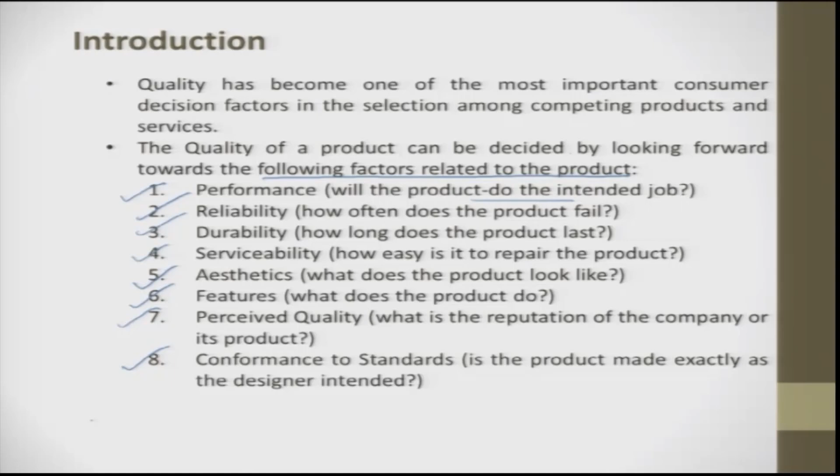I am holding a pen which is a Parker pen. Parker has its own reputation. Because of the Parker company's reputation, when I hold this product, my reputation also goes high - that is perceived quality. What comes last is conformance to standards: is the product made exactly for what the designer intended? So conformance to standard - these are some of the factors related to the product where the quality of the product is talked about.

So, statistical methods for quality control and improvement. There are three major areas where people have been working drastically, and they have included a lot of math behind it, meaning it is a scientific approach: statistical process control. People have come out with design of experiments, and people have also come up with acceptance sampling.

For example, I buy 10,000 pieces in a lot, and before I accept, if I start checking all 10,000 pieces and then say yes the lot is good, it is going to be time consuming. But one logic is, if all the 10,000 are manufactured from the same company by a machine or group of machines, then naturally the products produced are going to be good. So inspecting 10,000 pieces every time is next to impossible. So what I do is randomly pick some 5 or 10, check the status of all of them, and if it is all good, then I accept the lot. That is what is acceptance sampling.

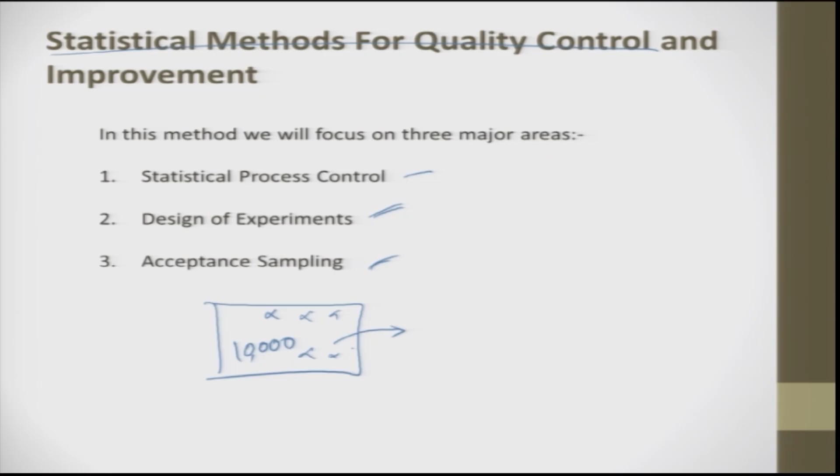And here also there are a lot of logics. If it is a vital product, 100% has to be checked. If it is a non-vital product or part, then they say out of this 5, if 2 fail also, it is okay, you can accept the lot.

There are certain things like that.

Statistical process control is a powerful collection of problem solving tools, useful in achieving process stability and improving capability through the reduction of variability. There are 7 tools generally used as part of SPC: histogram, check sheet, Pareto chart, cause and effect diagram, defect concentration diagram, scatter diagram, and control charts. These are always thought of as part of SPC, which is to be followed inside your factory so that you produce quality output.

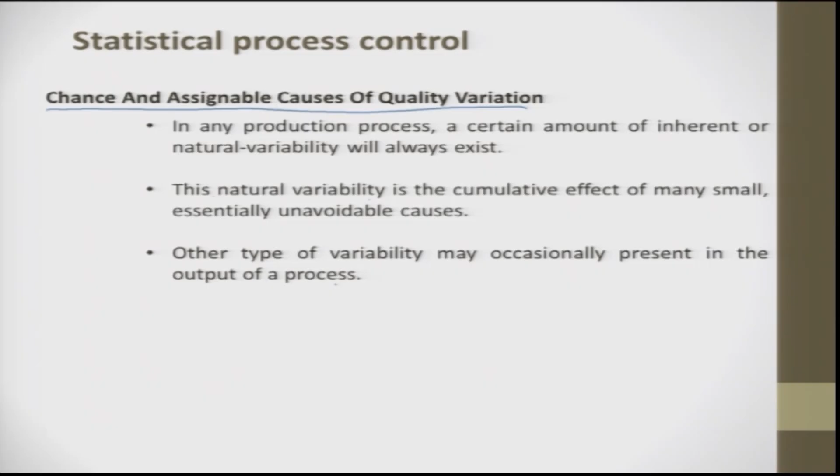The other thing is chance and assignable cause of quality variation. In any production process, a certain amount of inherent or natural variability will always exist. This natural variability is the cumulative effect of many small, essentially unavoidable causes. The other type of variability may occasionally be present in the output of a process, and this is called assignable.

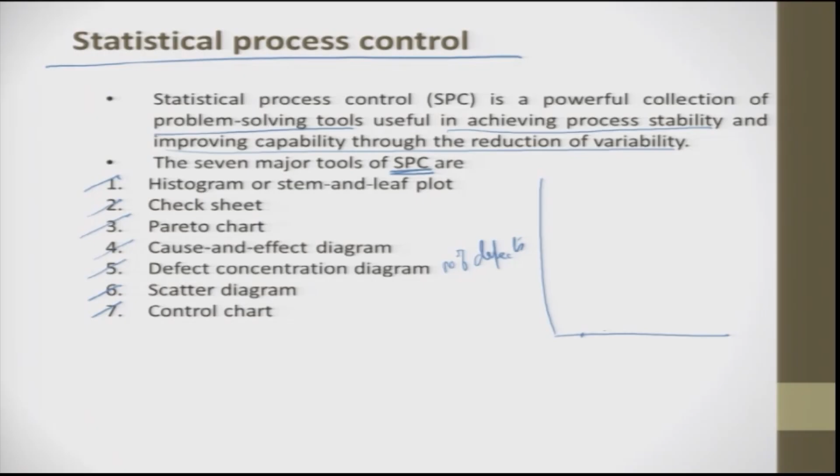There are control charts, but let's go back to histogram analysis. Suppose we plot the defects on one axis, and the number of defects, and the other axis can be parts - part A, part B, part C, part D. You have a block diagram showing how many of part A failed in that period. For example, in the 52nd week, how many parts of A failed, B failed, C failed, D failed - that is called histogram analysis.

The check sheet - you can see this in airports and other places where a checklist is given. People ask you to check whether this document is submitted, that document is submitted, then this, then this, then finally you upload. That is a check sheet. We give a standard procedure and you follow it.

Pareto analysis is almost the same, but here we try to see what is the effect of these defects on the output. That is what we see in Pareto analysis.

Cause and effect diagram is something like a fishbone diagram. We try to show these are the causes and this is the effect of it.

Then the defect concentration diagram - it tries to tell how many defects have happened in that period of time. That is called the defect concentration diagram.

Scatter diagram is where you plot all the defects and try to make a cluster. Then you circle out the cluster and try to figure out what caused this cluster to form. That is what a scatter diagram is, and we can talk more about it later.

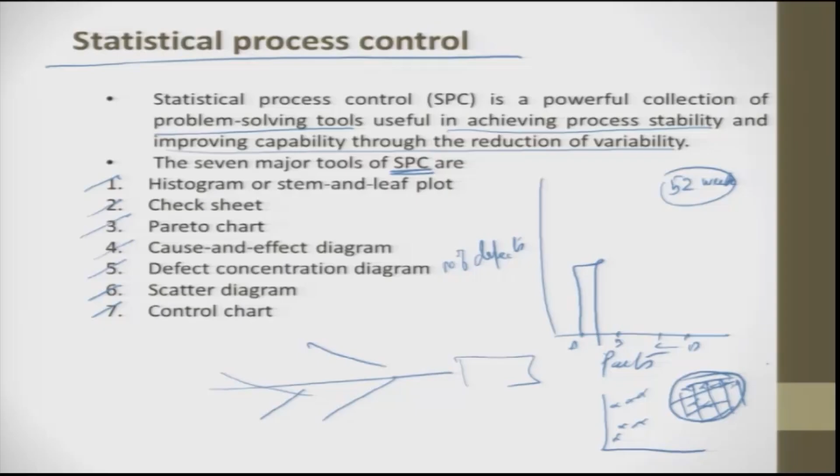Control chart is P chart, X chart - we will see all those details later. A control chart is one of the primary techniques of statistical process control. This type of chart plots the average of measurements of quality characteristics in samples taken from the process versus time.

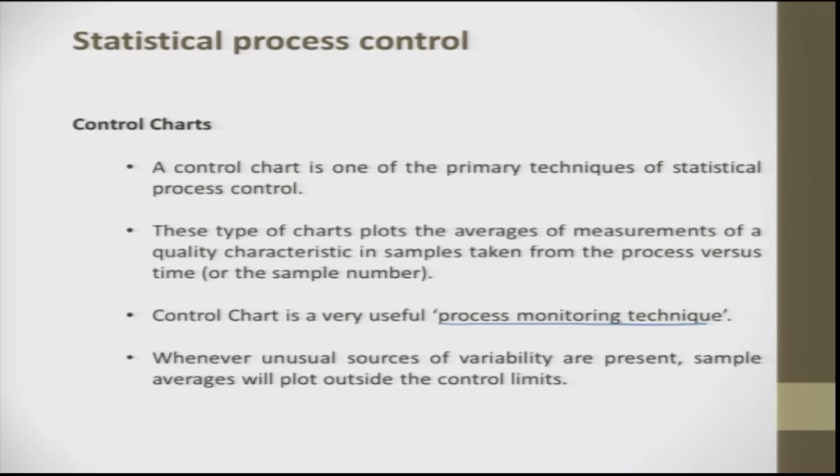We take a product, a part which is produced - this can be once in 50 parts or once in half an hour. We pull it out and check the various dimensions and deviations and note it down. The control chart is a very useful process monitoring technique, because at every 50 or every 100 parts you pull out, measure the features, and report those features.

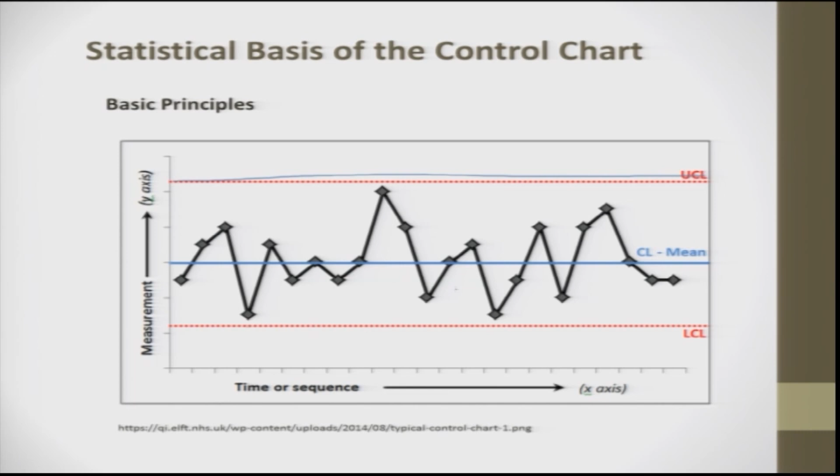If you look at the diagram, it's clear there is variation happening at regular intervals of time. Whenever it tries to go very close to the upper or lower control limit, we try to reset - for example, we resharpen, relook into the fixture, or change the tool. Once that is done, you can see it pulls back and goes into the normal range. So this gives me a lead that the time has come to reset your process.

So the basic principle, as I've already explained, talks about the chart containing a central line that represents the average value of the quality characteristics corresponding to the in-control state.

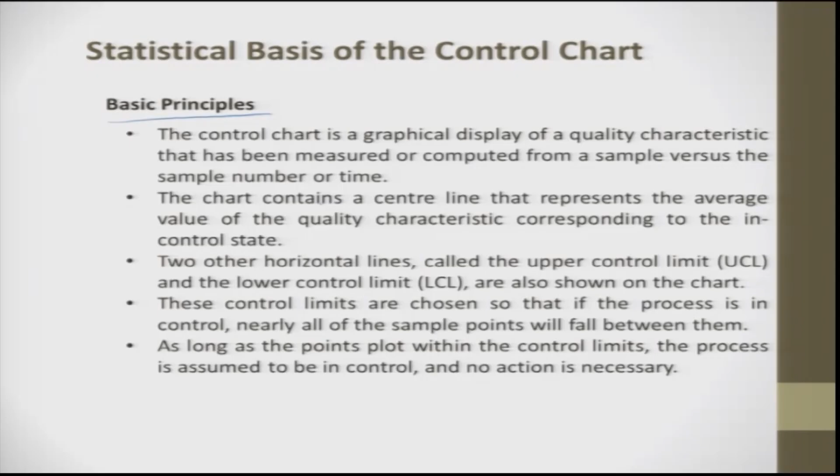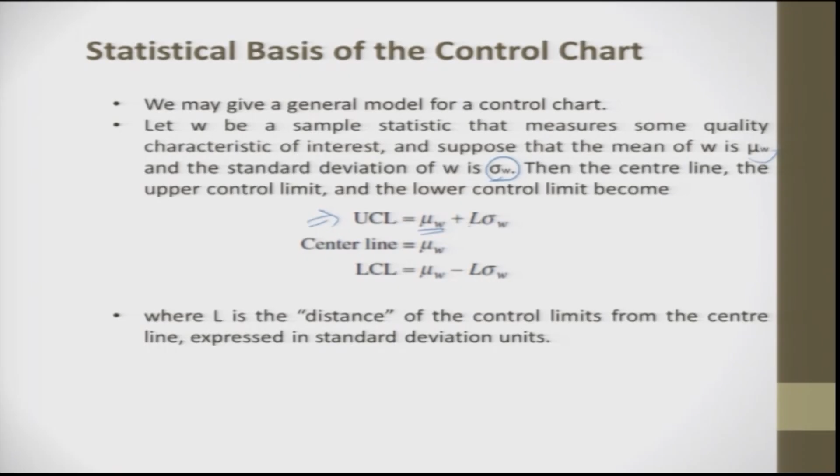L stands for the distance of the control limits from the center line. This is the statistical basis for the control chart. The control chart is a device that describes in a precise manner exactly what is meant by statistical control.

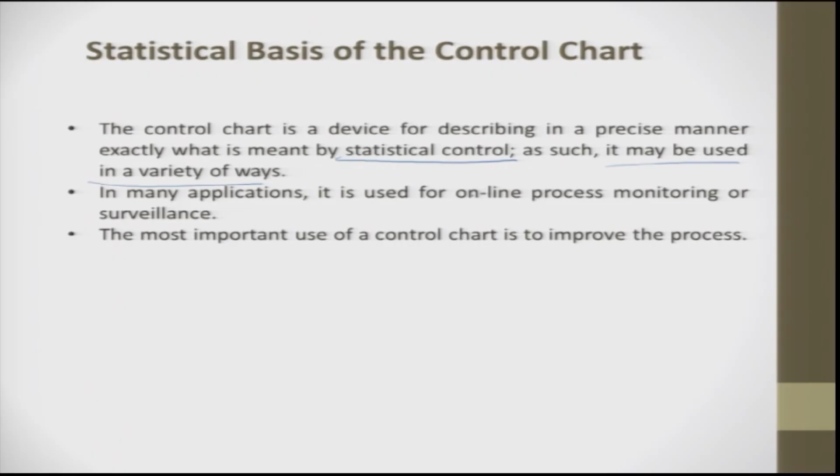As such, it may be used in a variety of ways. In many applications it can be used online, and many times it can also be used offline. So input, here is a process, it can be reading, cooking, machining, or assembly. So input, process, you get an output.

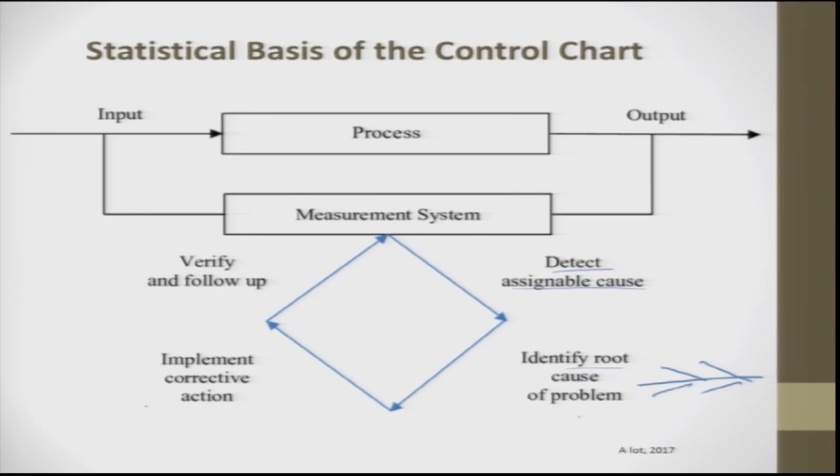So you try to measure, you try to detect an assignable cause, then you identify the root cause for the problem. This is done by the Ishikawa diagram, and then you implement the correction, and now verify once again whether the defects are coming or not. If it is not coming, it is fine. If it is coming, then once again go into the root and try to modify it. So this is called an assignable cause.

So the statistical basis for the control chart is a very important part of the corrective action process associated with the control chart, usually known as the out of control action plan, OCAP.

OCAP is a flow chart or a text based description of the sequence of activities that must take place following the occurrence of an out of control event. So it is like a cause, and it describes what sequence of things must be done so that you can get back to your normal state. That is the out of control action plan. When the process goes out of control, what is the action plan to be taken?

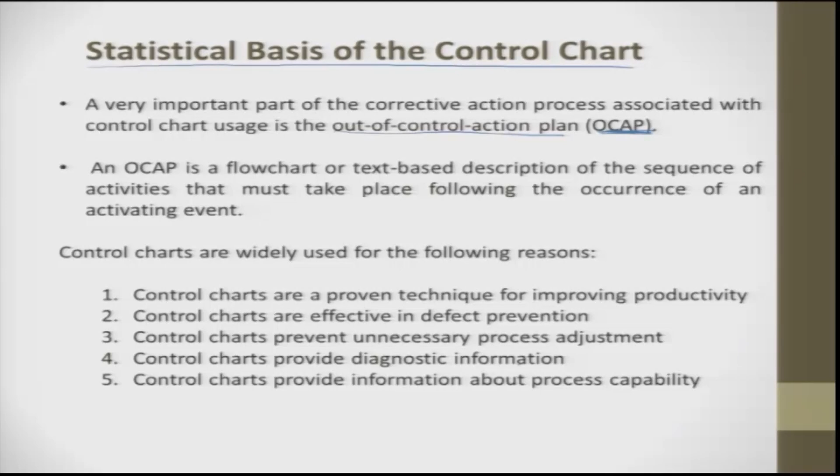The control charts are widely used for the following reasons. They are proven techniques for improving productivity, to reduce defects, to prevent unnecessary process adjustments, to provide diagnostic information, and to provide information about the process capability.

The sample size and sample frequency is another interesting topic to note. In designing a control chart, we must specify both the sample size and the frequency of sampling. So frequency of sampling is 1 in 50, 1 in 100. Sample size is, within that 50, how many samples you have to take.

We can evaluate the decision regarding sample size and sample frequency through the average run length, ARL, of the control chart. If the process observations are uncorrelated, then for any Shewhart control chart, ARL can be calculated as 1 by P, where P is the probability that any point exceeds the control limit. This equation can be used to evaluate the performance of a control chart.

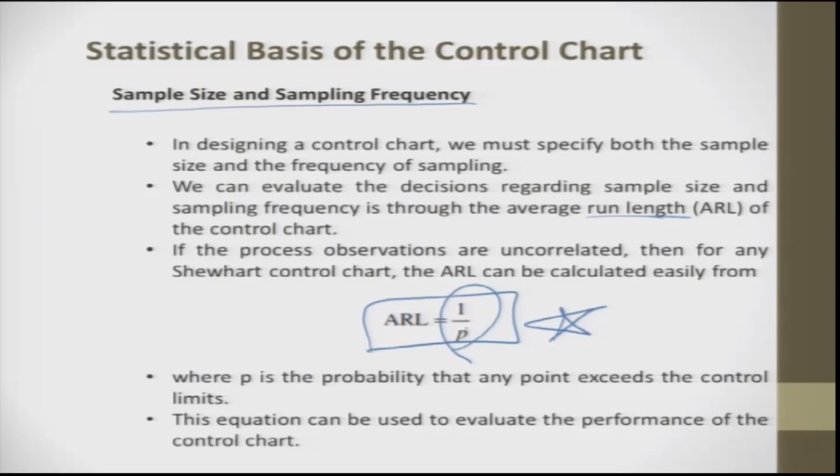This is very, very important. If the process observations are uncorrelated, then for any Shewhart control chart, the ARL can be calculated as ARL equal to 1 by P, where P is the probability of any point which crosses that limit. It is also occasionally convenient to express the performance of a control chart in terms of its average time to signal, ATS. ATS is ARL into H, where H is in hours.

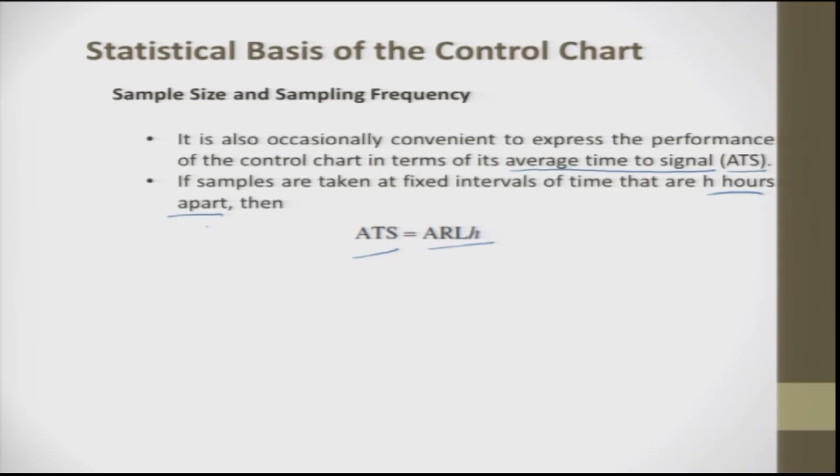So there are several phases, phase 1 and phase 2, of control chart application. The standard control chart usage involves phase 1 as well as phase 2 application with two different and distinct objectives. In phase 1, a set of process data is gathered and analyzed all at once in a retrospective analysis.

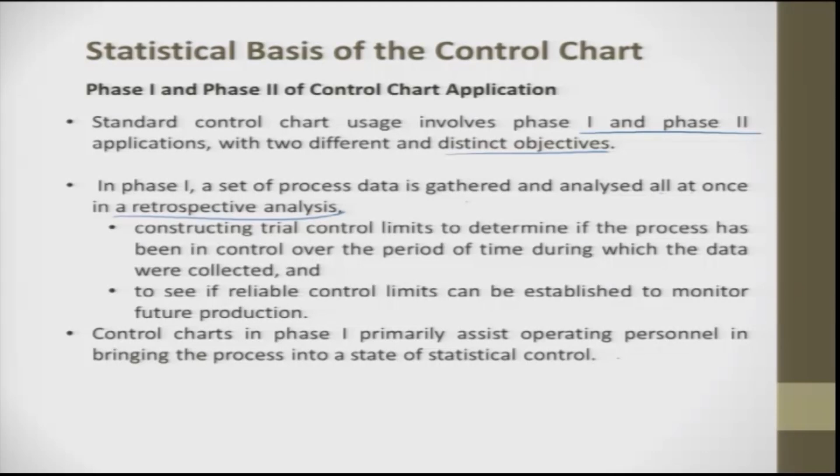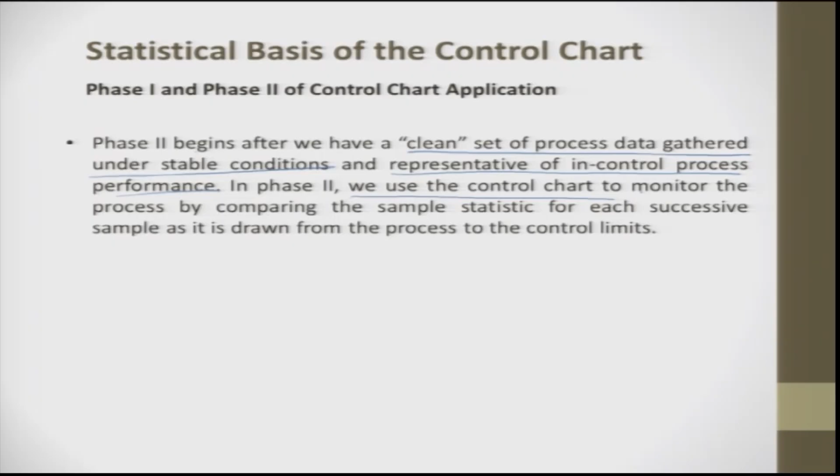The control chart in phase 1 primarily assists operating persons in bringing the process into a state of statistical control, so gathering and analysis of the data is done in phase 1. In phase 2, we begin after we have a clean set of process data gathered under stable conditions and representative of in-control process performance. In phase 2, we use control charts to monitor the process by comparing the sample statistics for each successive sample.

Application of statistical process control and quality improvement tools in transactional and service businesses: the flow chart, operation process chart, and value stream mapping are particularly useful in developing process definition and process understanding. A flow chart is what?

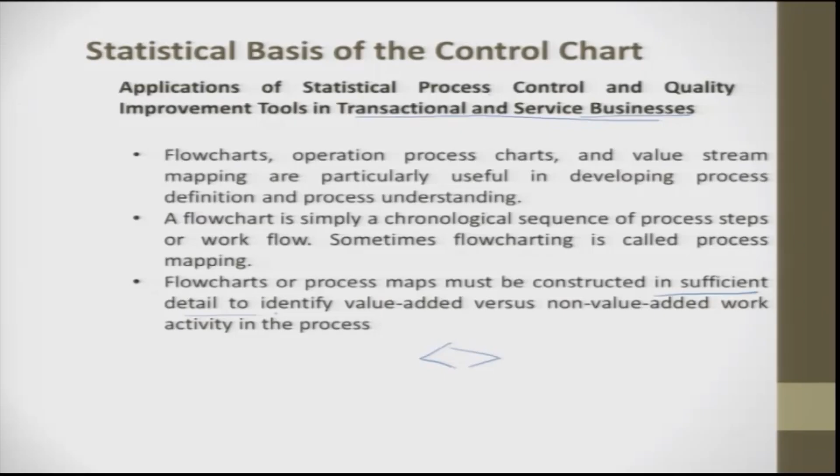A simple, logical way of representing a matter or a protocol in a pictorial, chronological manner is the activity of a flow chart. A flow chart or process map must be constructed in sufficient detail to identify value added versus non-value added work activities.

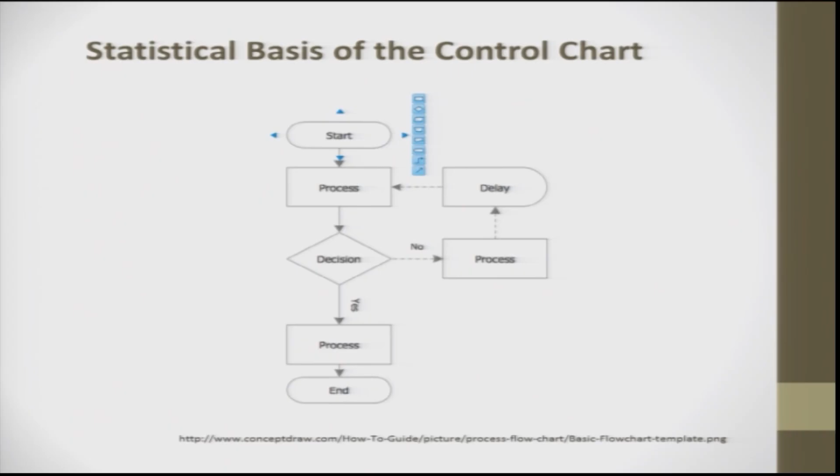This is the statistical base of the control chart, where we follow a flow chart: start, process, D stands for delay, the process is going on, a decision is taken, and then it proceeds.

When we talk about quality control and improvement, statistical process control, control charts for variables and control charts for attributes are available. When the variables are measurable, we use control charts for variables. For control charts for attributes, we always consider a yes/no factor, such as whether the product is working or not.

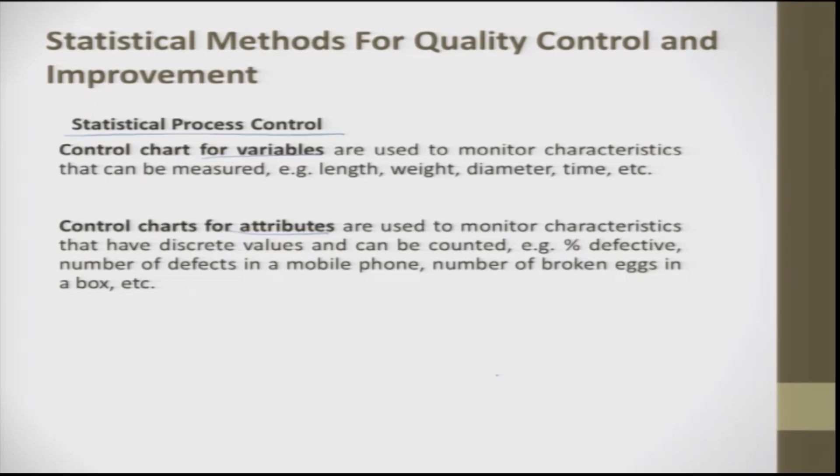Attribute charts are used to monitor characteristics that have discrete values and can be counted. For example, a cell phone working or not working, one defective. Examples include percentage defective or number of defects on a mobile phone, number of broken eggs in a box, etc.

So for n equal to 1, you do this; for n between 2 to 10, you use the R bar chart; and if it is greater than 10, you always go for the S bar chart.

When you consider attributes, it can be single attribute or multiple attributes. For single attribute, if the sample size is constant, it is an NP chart; if not, it is a P chart. For multiple attributes, if the sample size is constant, it is a C chart; if not, it is a U chart.

This is very, very important. So here are some of the formulas which are given.

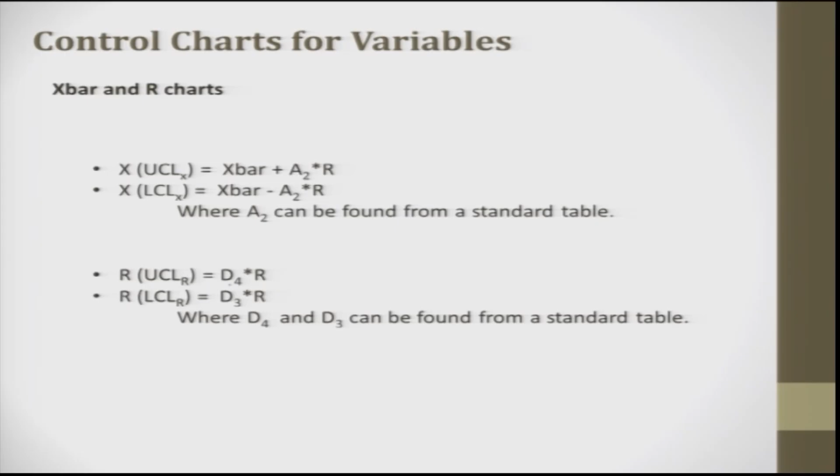We are trying to figure out the upper control and lower control limits for X bar, and upper critical and lower critical for R. You can expect a problem where I give you a set of data and ask you to draw a control chart, find out some value from the control chart, or figure out the lower control limit, upper control limit, etc.

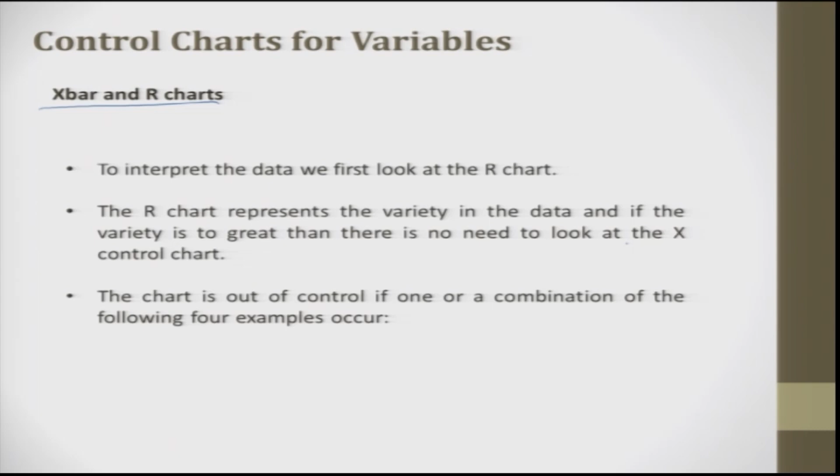I have dealt with the X bar chart and R bar chart, for n between 2 to 10 and greater than 10. The R bar chart represents the variety in the data; if the variety exceeds the limit, there's no need to look at the X control chart—the chart is out of control, and we have to go for this combination.

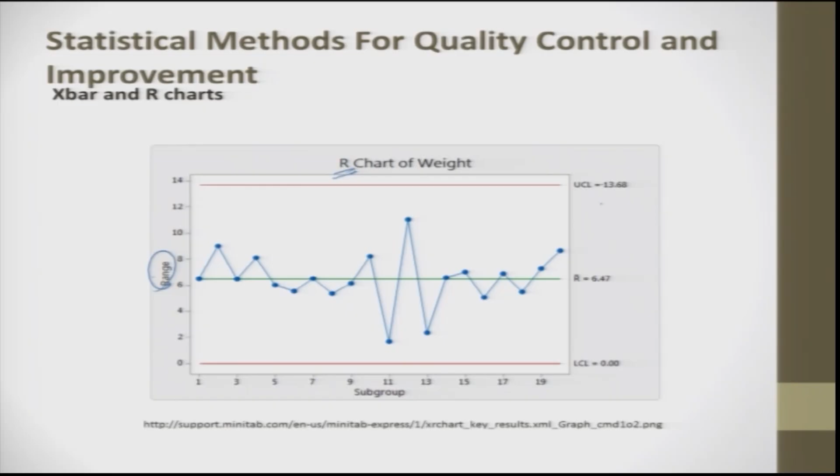P chart and C chart apply to percentage of leaking caulking tubes in a box of 48, percentage of broken eggs in a carton—these are all P charts. Number of flaws or stains in a carpet sample cut from a production run is a C chart. Number of complaints per customer at a hotel is also relevant here.

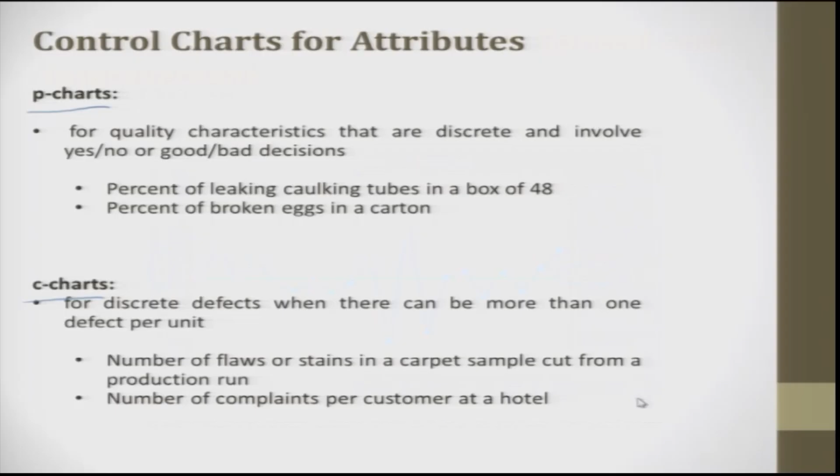Going back, what is the C chart and U chart? So for the attribute charts, how are the formulas done? These are the formulas used to find the C chart.

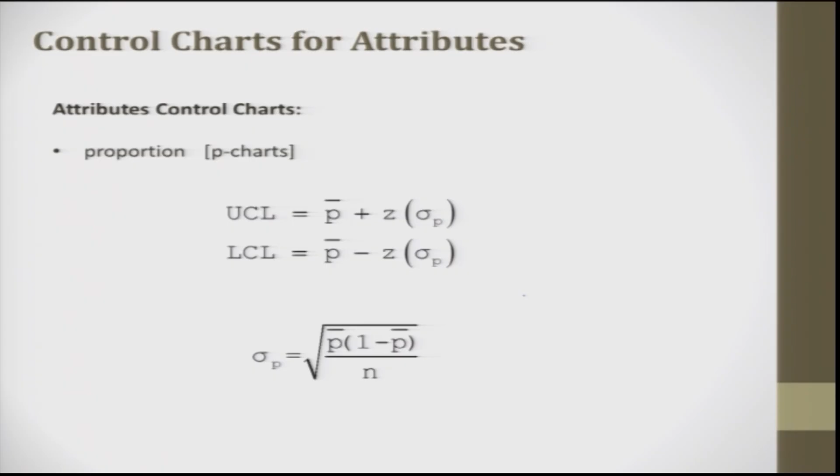Similarly, for the P chart, this is the upper critical limit and lower critical limit—this is how they calculate the sigma. The control limits can be found using this formula. For the P type, again the same pull-back is done.

The control chart for non-conformability, or non-conformities—that is, defects. Non-conformities are defects. A non-conforming item is a unit of product that does not satisfy one or more of the specifications of the product.

That is non-conformance. People always say please submit a non-conformance report. Non-conformance report means I have given you a specification, you have produced something, and when I measured it, these are the parameters which did not stick on or which were not seen in your part. Each specific point at which the specification is not satisfied results in a defect or non-conformity point. You have a shaft, and here are some points where the conformation is not happening.

This can also be represented in a figure. If you go back to the 7 tools, the defect concentration diagram is that. Here what we do is draw the diagram and try to put in how many failures have happened in that particular feature, or will happen at that particular feature, and then put the numbers in. Just by looking at the figures, I can easily find out where exactly the fault is.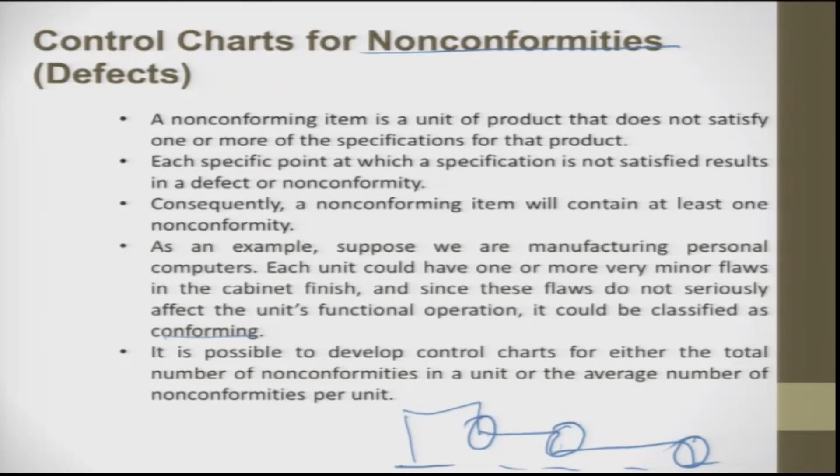It is non-conforming if it does not meet the specification. It is possible to develop a control chart for either the total number of non-conformities in a unit, or try to take an average.

Further analysis of non-conformities shows that defects or non-conformity data are always more informative than fraction non-conforming, because there will usually be several different types of non-conformity. By analyzing the non-conformity by type, we can often gain considerable insight about the defect.

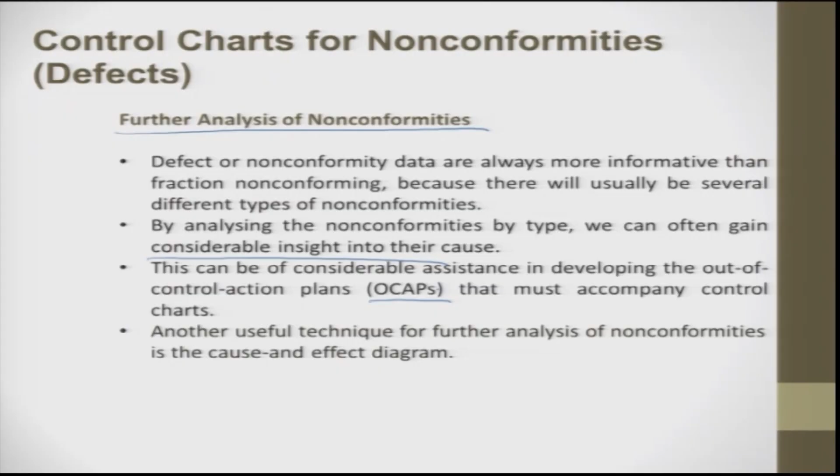Then we will go to the OCAP chart, out of control action plan chart. We revise the process, refer it along with the cause and effect diagram, and come out with a solution.

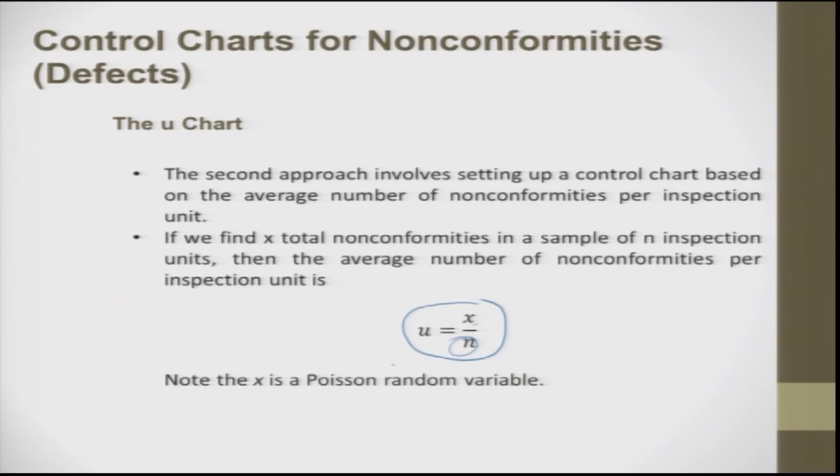This is used by a chart called the U chart. The U chart is nothing but x divided by n, where x is the total non-conformity in a sample and n is the inspection sample size. So n is the number of samples you have done and x is the total non-conformity in a sample. You can also have a UCL and LCL for the same and try to do a chart within that.

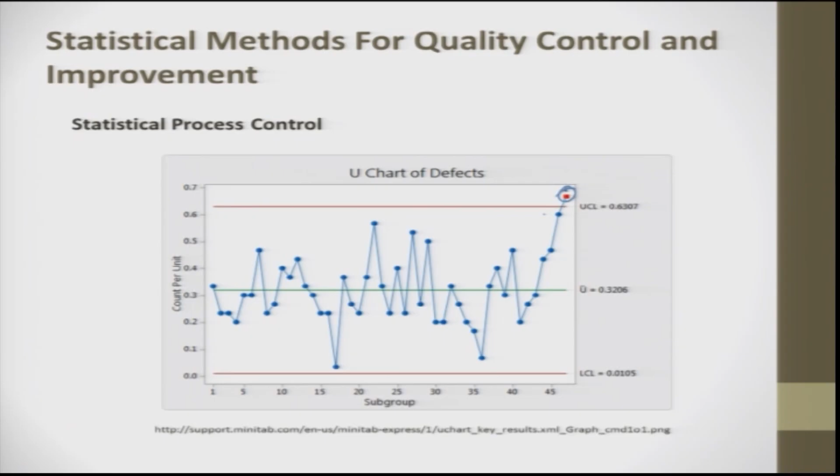So the choice between attributes and variable control charts is very important. The attribute control chart has the advantage that several quality characteristics can be considered jointly, and the unit classified as non-conforming if it fails to meet the requirements.

When you talk about variables - length, height, dimension, whatever it is - that is variables which can be measured. Attributes are yes and no, go, no go. There can be so many reasons for it to become no go, so many conditions not met, but still the product is working, so it will get through.

So the attribute control chart is very interesting and has to be chosen in such a way that you try to get the exact information out of it.

On the other hand, if several quality characteristics are treated as variables, then each one must be measured and either a separate x-bar and R chart must be maintained on each, or some multivariate control techniques considering all the other characteristics must simultaneously be employed.

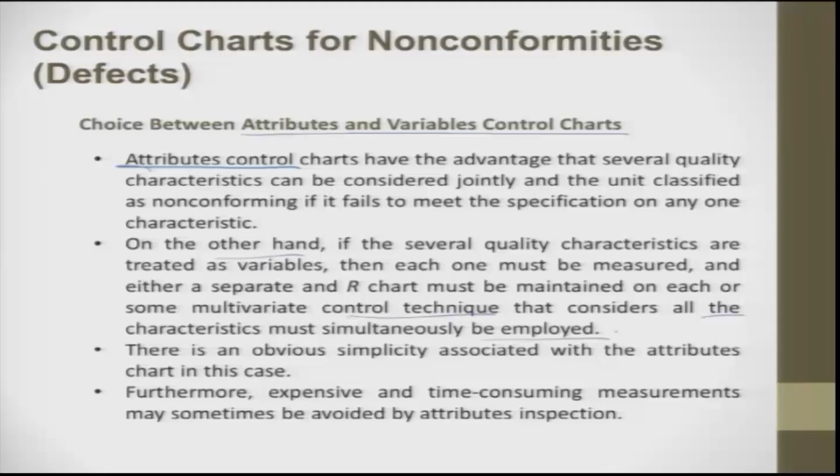We are trying to take R, that is okay, but when you try to take R, you might have several reasons, and if you can make all those reasons variables, you measure it and then do it. This is the simplest technique to do.

The variable control chart in contrast provides more useful information on individual features. It does not talk about a feature, it talks about the dimension of a feature. The specific information about the process mean and the variability is obtained directly here.

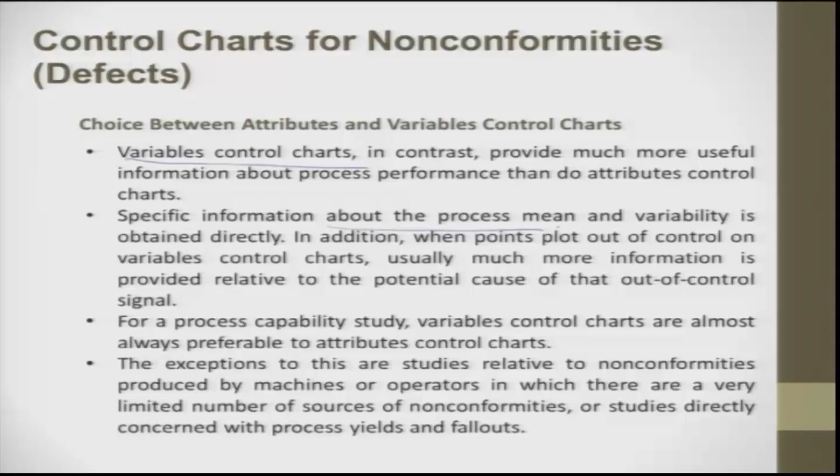I have already dealt with this, so I do not want to go through it line by line. Guidelines for implementing the control chart: determine which process characteristics to be controlled. Before even doing this, you should try to figure out those variables which are considered controllable variables, and only those must be considered.

If you try to take the atmosphere - temperature at Kanpur in summer is 45 degrees, and temperature at Kanpur during winter is around 4 degrees. So temperature is one thing which I cannot control.

Generally what happens is we try to take the characteristics of a feature or product, and it has to be a controllable feature with a proper device to measure the deviation. Then we determine where the chart should be implemented in the process.

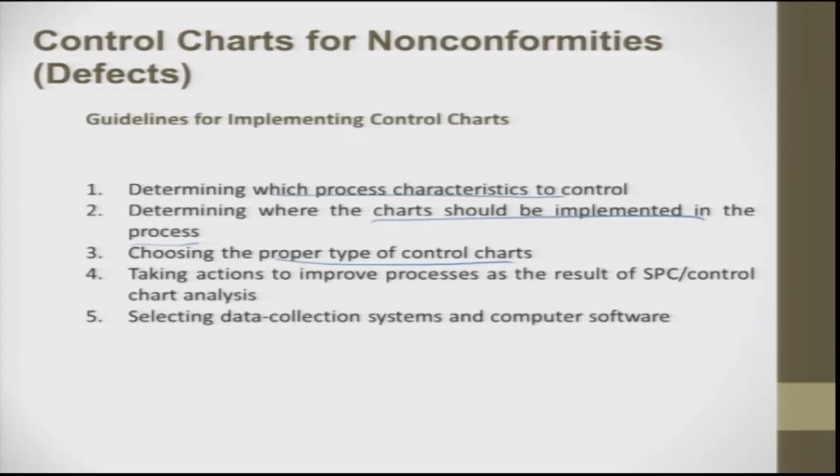Choosing the proper type of control chart is very important. Taking action to improve the process as a result of SPC is done, then we start collecting the data and analyzing it through software.

The next important topic in statistical methods for quality control is design of experiments. If I have to find out the best optimum condition for making a product, I will have to do multiple levels of experiments and come out with data showing the best process parameters for making that particular product.

So here, design of experiments means I try to design my experiments so that I do a lesser number of experiments but still learn more about the process and the levels of the process parameters. It is extremely helpful in discovering the key variables influencing the quality characteristics of interest in a process, and it is an approach to systematically vary the controllable input factors in a process.

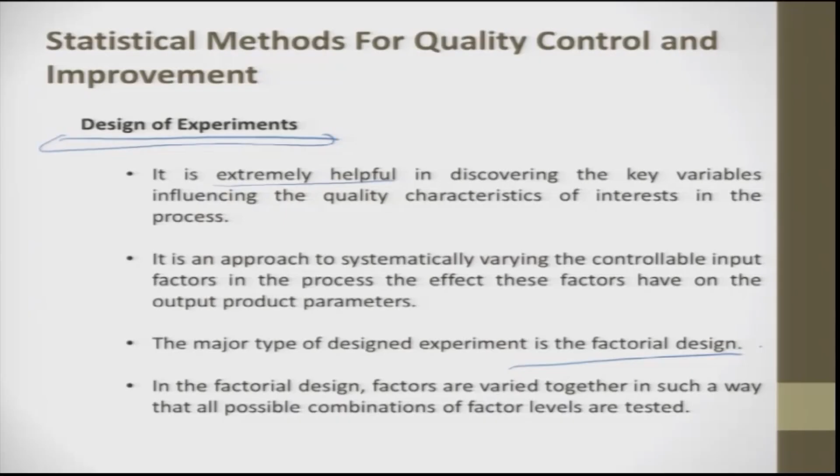The major type of design of experiments is factorial experiments. In factorial experiments, the factors are varied together so that all combinations of factors are obtained.

So, acceptance sampling. Acceptance sampling is connected with inspection and testing of a product. A lot of product is there, m units are sampled, and if there are zero defects, the lot is accepted. If not, 100% is inspected and non-conforming units are replaced.

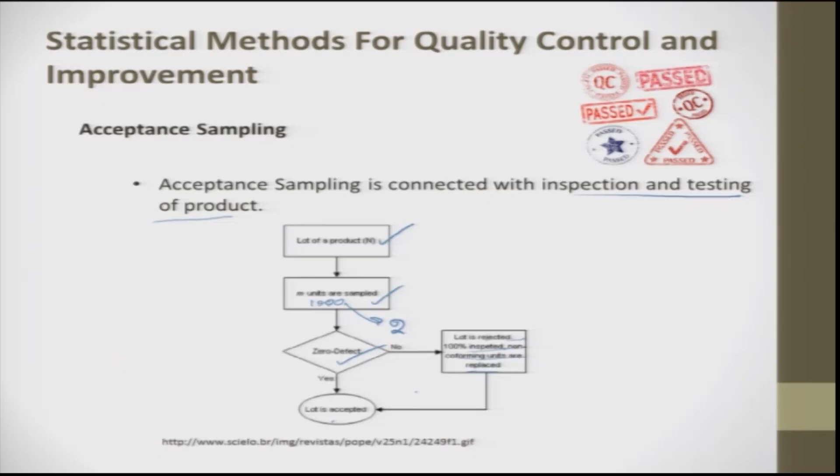So they do random pick. In the random pick, everything is checked through - say 1000 pieces are randomly picked, and if all are okay, the lot is accepted. If the 1000 pieces have some defective, say 2 pieces, then sorting has to be done. This is acceptance sampling, connected with the inspection and testing of a product.

So the quality test - what a student is asked to do is note down an event that you do regularly. For example, you wake up, or you leave to office, coming back home, and then sleep.

Try to take the data for at least one week - what time you wake up, what time you leave to office, what time you come back home, what time you sleep. Actually, one week is too small, take at least 10 days. So you will have x1, x2, x3, x4, x5 going up to x10.

You try to calculate the mean and the sigma for this data. Then you plot a control chart showing your upper control limit, lower control limit, your mean, and daily at what time you wake up. If you plot this, you will see a naturally occurring event and how this control chart helps to improve things.

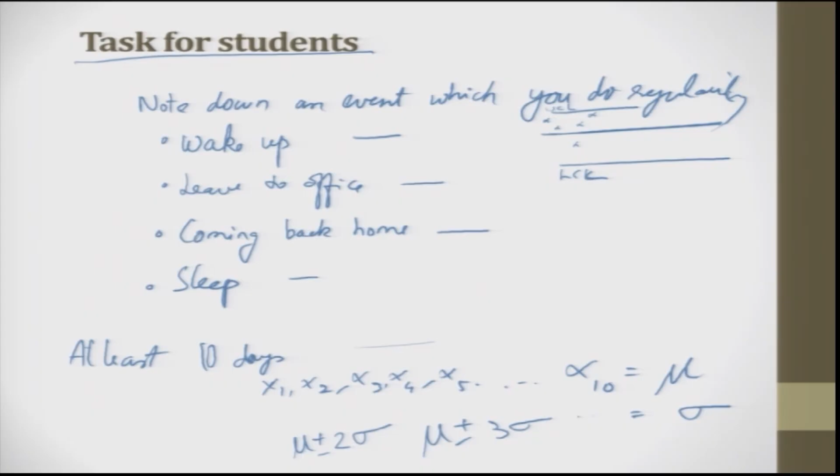So please try to do it for 4 different events for 10 days, plot it, calculate the mean, then calculate sigma, then decide mu plus or minus 2 sigma, mu plus or minus 3 sigma. Now you can tell how consistent your process is - of waking up, sleeping, coming back home, or leaving to the office.